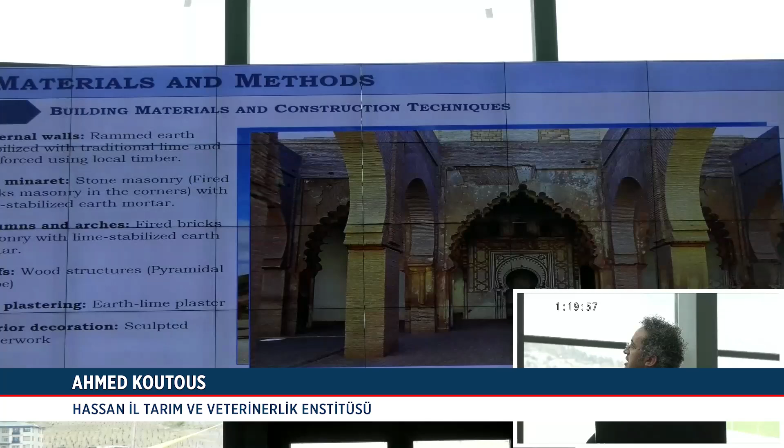The materials and techniques used to construct this building are rammed earth for the walls, reinforced using local timber, and for the minaret we have stone masonry using lime-stabilized earth mortar. For the roofs we have wooden structures, and for the interior plastering, earth lime plaster.

So the methodology of this study is quickly analyzing the design of the building to see if it complies with the guidelines regarding what we call non-engineered construction of buildings, the principles of earthquake-resistant standards for this kind of building. One, we have the construction site, which has to be away from dangerous areas due to their geological and geotechnical conditions.

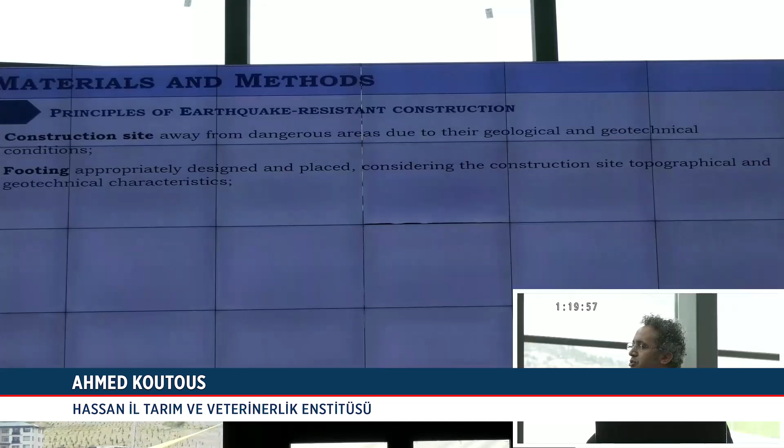Number two, we have the footing, which has to be well designed and placed, considering the construction site's topographical and geotechnical characteristics. Third, the materials and the implementation have to be of required quality, taking into consideration the limitations of the mechanical performance of these kinds of materials. The maintenance also is very important. So regular maintenance has to be done so that we can keep structures in their original condition.

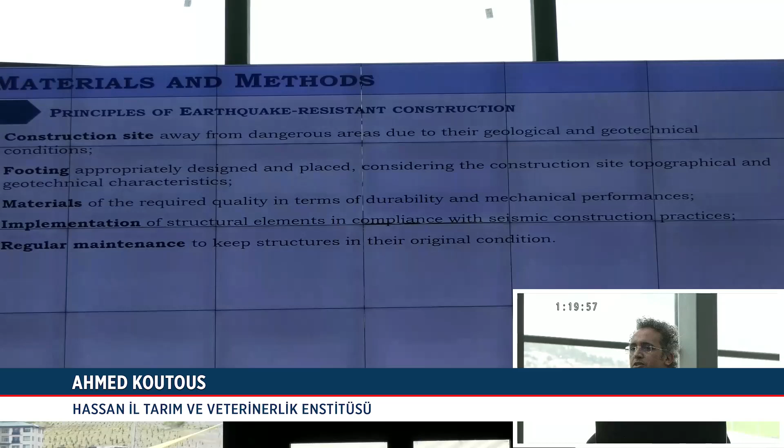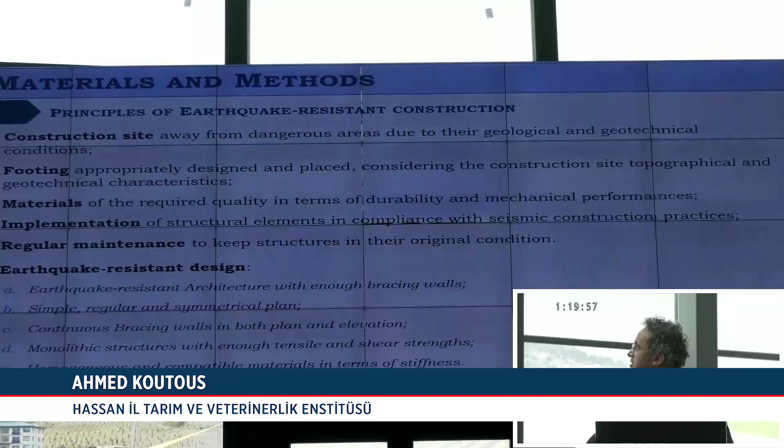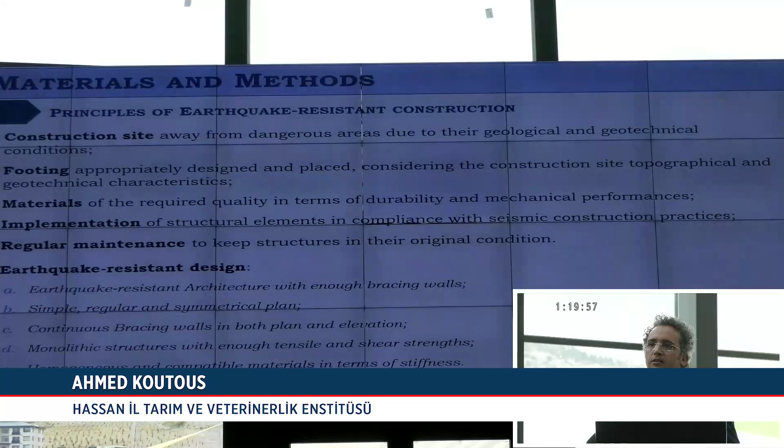And of course, the design of the buildings has to be earthquake-resistant design, meaning earthquake-resistant architecture: the architects, when they are working on design, should work together with structural engineers. The shape of the building has to be simple, regular, and as symmetrical as possible. We need continuous bracing walls in both plan and elevation, monolithic structures with enough tensile and shear strength, homogeneous and compatible materials in terms of stiffness. So mixing different kinds of materials can be a source of problems.

This kind of guidelines you can find in codes for non-engineered buildings. For example, for the placement of the building, it has to be away from the pressure stresses coming from the soil. The shape has to be simple. The ideal shape is a circular one, and then square and rectangle.

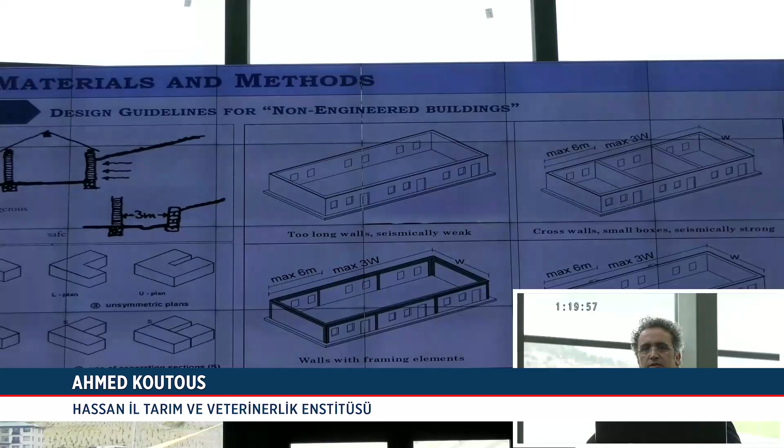If we cannot do this kind of design, we have to use separation sections between different blocks to make simple boxes. And this is what we can do if we have a rectangular building with a length very important compared to the width.

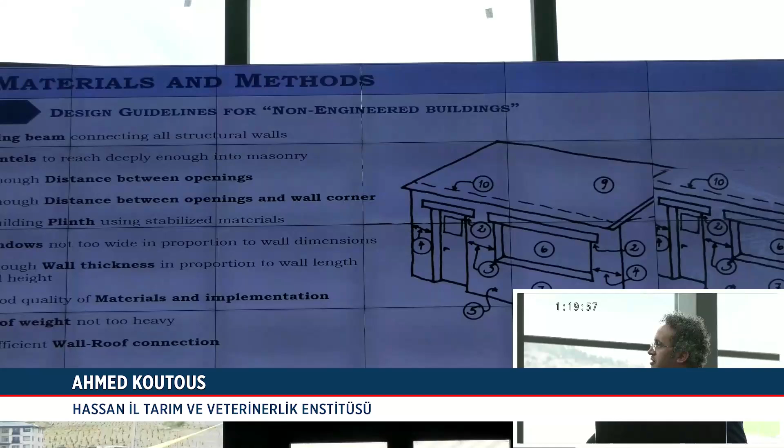Building with plinth using stabilized materials, which is stable in water. Windows not too wide in proportion to the wall dimensions. Enough wall thickness in proportion to wall length and height. Good quality of materials and implementation, of course. Roof weight, it has to be not very heavy, and sufficient wall-roof connections.

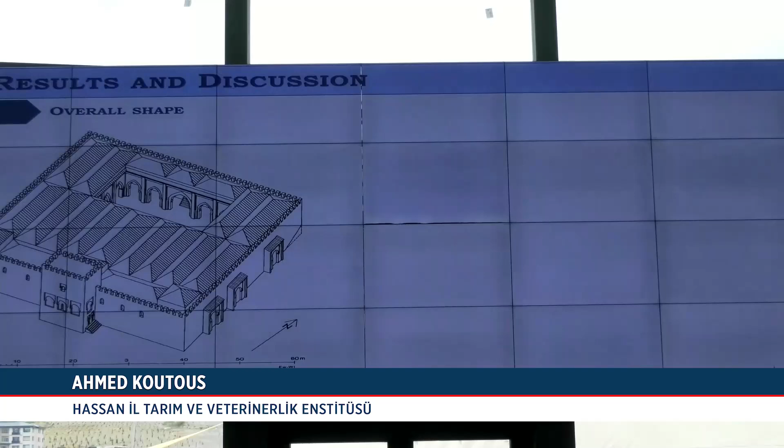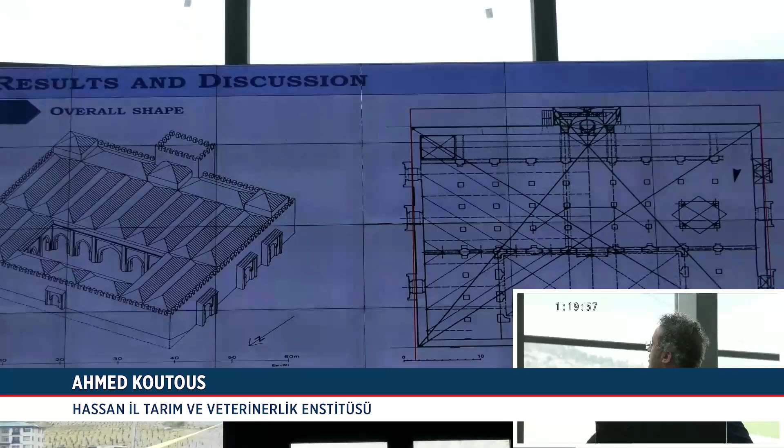We have some little mistakes regarding the directions of the walls. This is the restoration plan. We can see here we have a perfect plan of symmetry. Here we have a difference in level between the north and the south side of the building, which is not good.

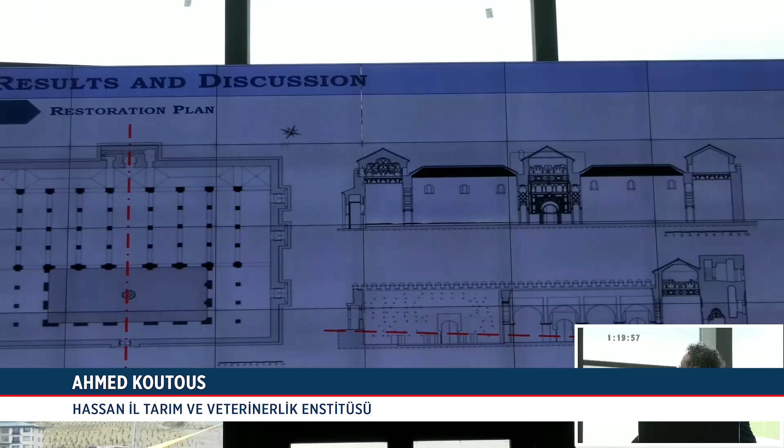If we consider each wall, we have here in the table the thickness of each wall, the height, the length. When we calculate the ratio of height to thickness, we can see that the walls of the arcades A are far from the limit. Also, the little wall we have here, M, for the minaret, the thickness is very small.

We have only the two walls, west and eastern wall, with enough thickness compared to the height and the length. So we can say that the weakest wall is the north one, because of its length compared to the thickness. The wall also we have for the minaret,

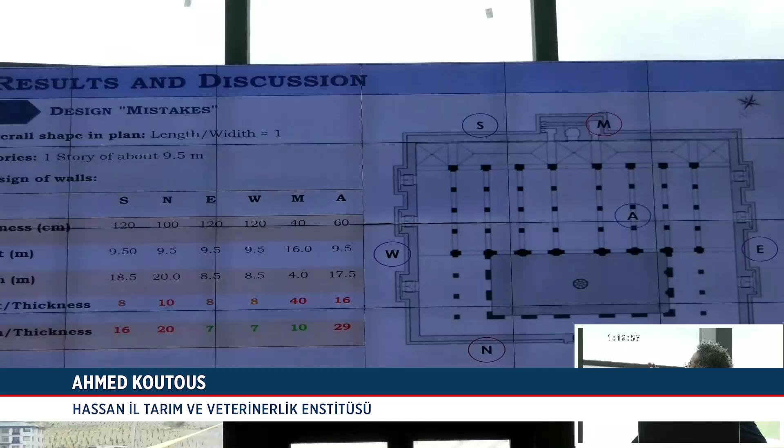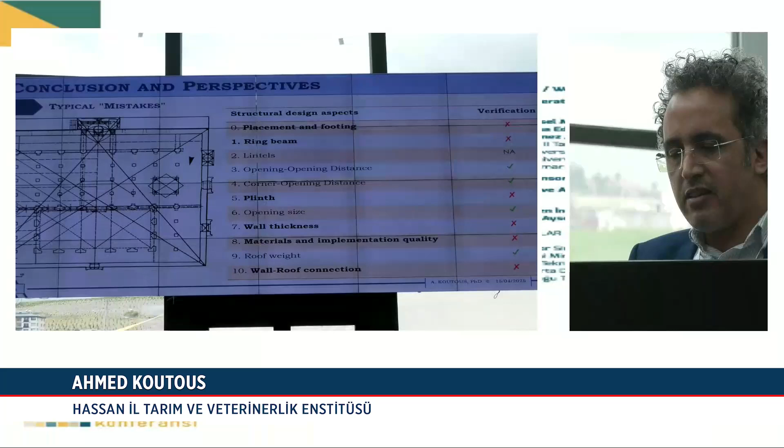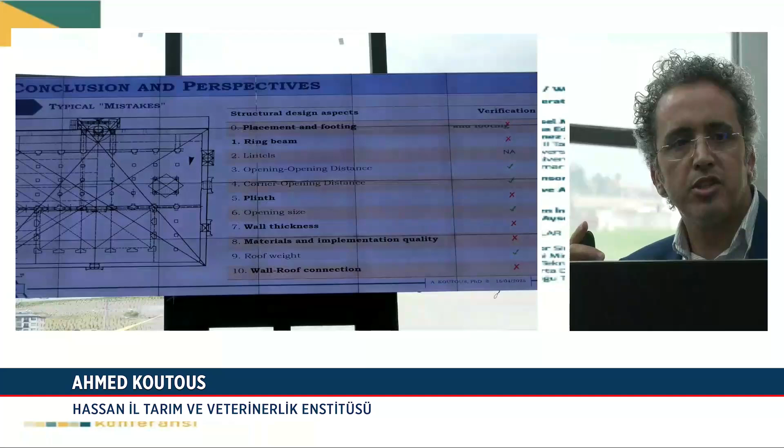So if we want to conclude about these typical mistakes, we have the placement and footing, which is not well done. We have the ring beam, which is lacking. We have the plinth also, which is lacking. The design of walls: the thickness is not enough, considering the length and the height. And some problems of materials and implementation quality, and also the lack of wall-roof connection in the majority of the buildings.

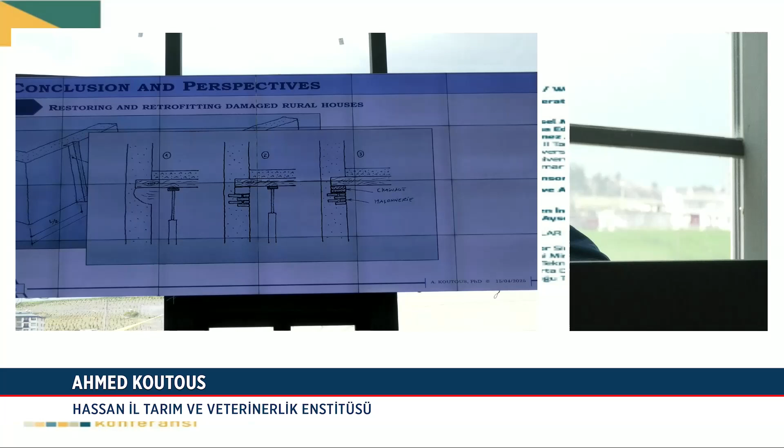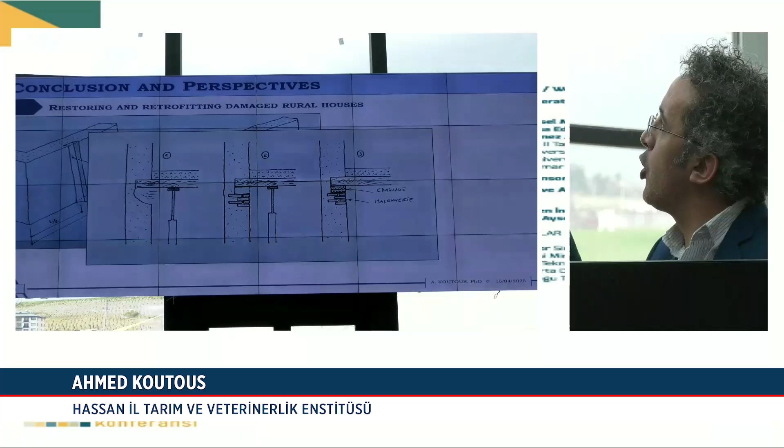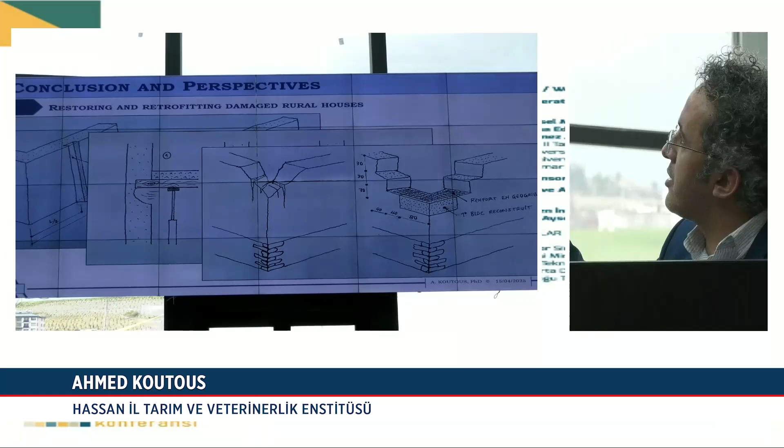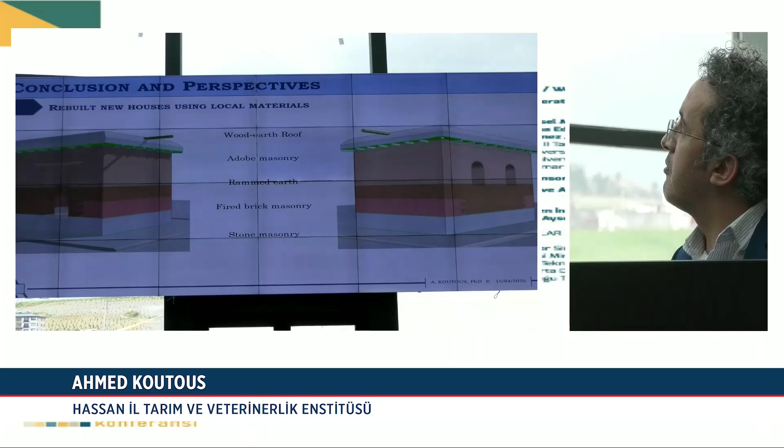This is the kind of drawing we are making to explain how to retrofit traditional buildings. For example, here, if we see that the ring beam is lacking, we can make it like this, and this is for supporting the walls which are very long, so that when the next earthquake comes, the wall will not collapse. This is the restoration of the corners of the buildings, because we also want to preserve the existing structures.

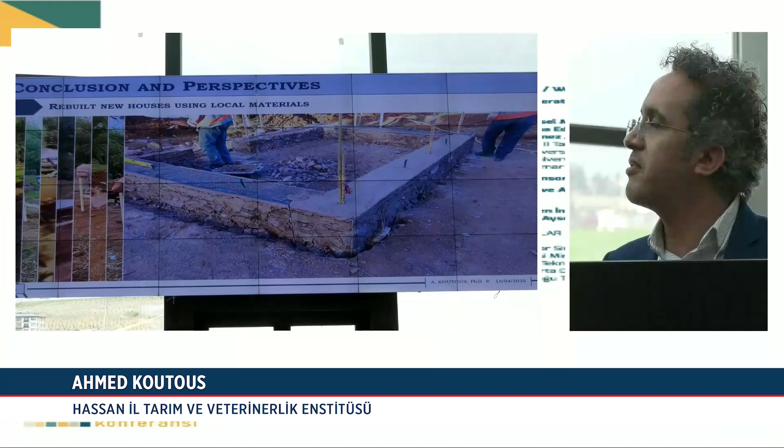For the short videos, we have this prototype of buildings. It's a small building to take pictures and videos, so that we can make these short videos I have talked about. These are the images we take. And we use these geogrid materials to reinforce instead of wood, because wood is not durable in these conditions. We use geogrid materials. This is for the stone masonry technique,

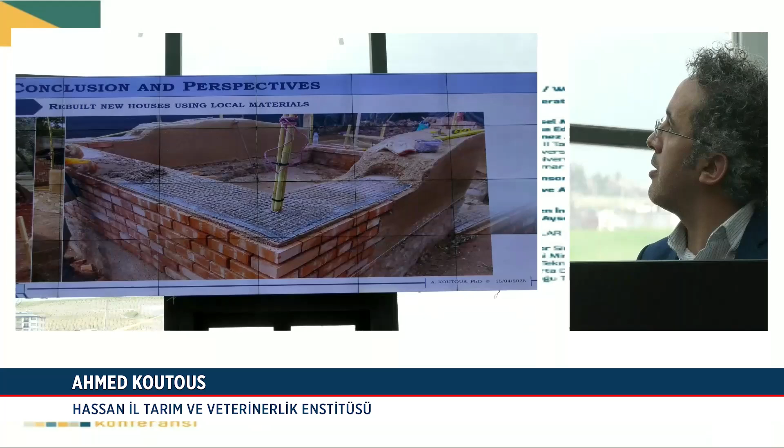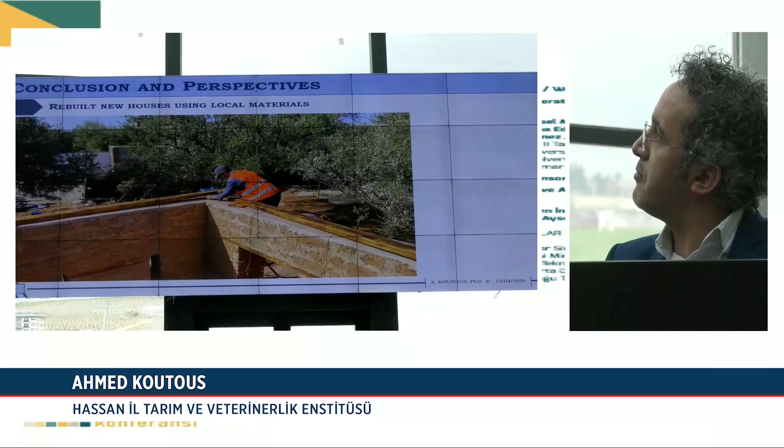fired brick masonry, reinforcement of the corners, adobe masonry. And this is for the ring beam. We use geogrid material with lime. It's lime concrete, not cement concrete. And this is for the ring beam using timber with connectors to the wall, so it cannot move when the earthquake comes.

And we also involve students, architects and engineers in this kind of project, so that they can learn new things, what we can do to make traditional buildings more resilient, more resistant to earthquakes. And this is the building at the end. We also carried out some field tests to better implement materials, to better choose good materials.